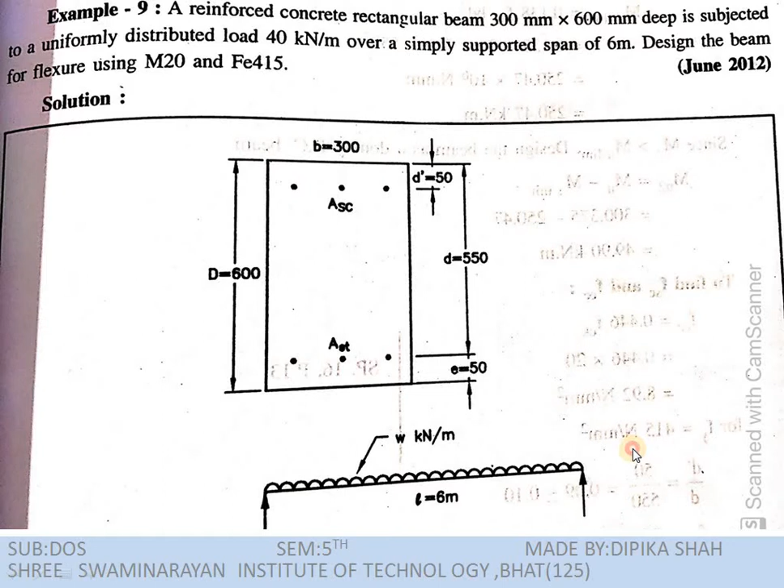For finding the self weight of the beam we have to calculate the area of the beam and then we will multiply with the density of the concrete. So area of the beam is 0.3 by 0.6 and density of the concrete is 25. So we will get a self weight of the beam of 4.5 kN per meter. Here imposed load is given. Imposed load is 40 kN per meter. So total weight coming on the beam is 44.5 kN per meter.

Okay, this load is a working load, so we have to multiply with 1.5 to get a factored load. So for a factored load we will multiply 1.5 by 44.5, so we will get W 66.75 kN per meter. Okay, now we have to calculate a moment. So for a moment in a simply supported beam, the equation is WL square by 8. So W is 66.75, L is given 6 meter. So we will put the value of W and L in this equation. So we will get MU 300.375 kN meter.

Okay, after finding the MU we have to calculate the MU limit. So for calculating the MU limit for M20 and Fe415 we have one equation 0.138 fck b d square, and this equation we have taken from SP16. So we will take this equation MU limit is equal to 0.138 fck b d square.

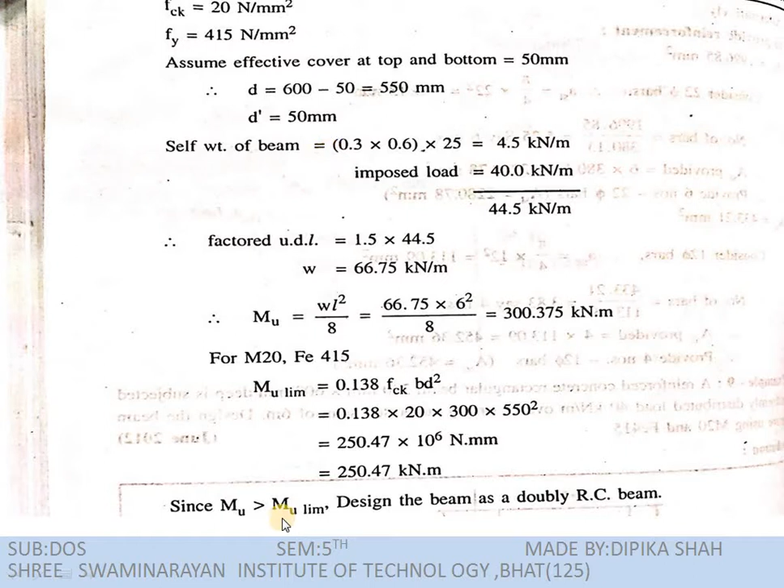Here MU is greater than MU limit, so we have to design as a DRC beam.

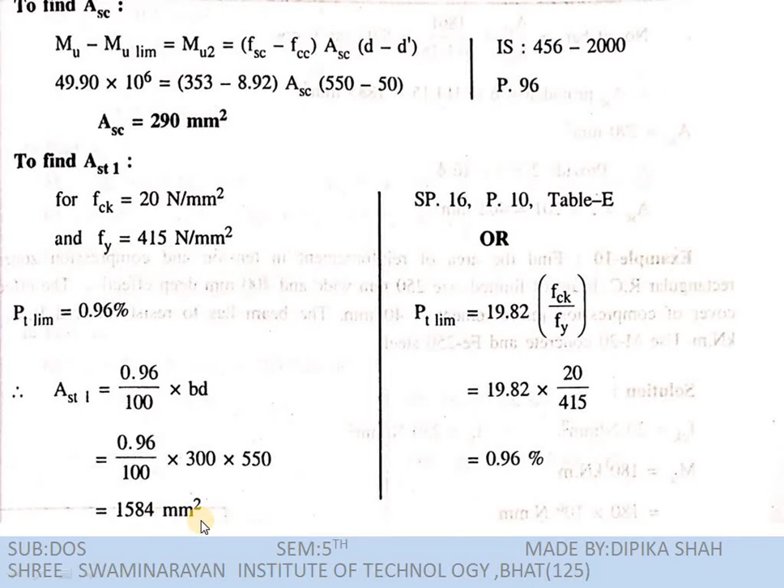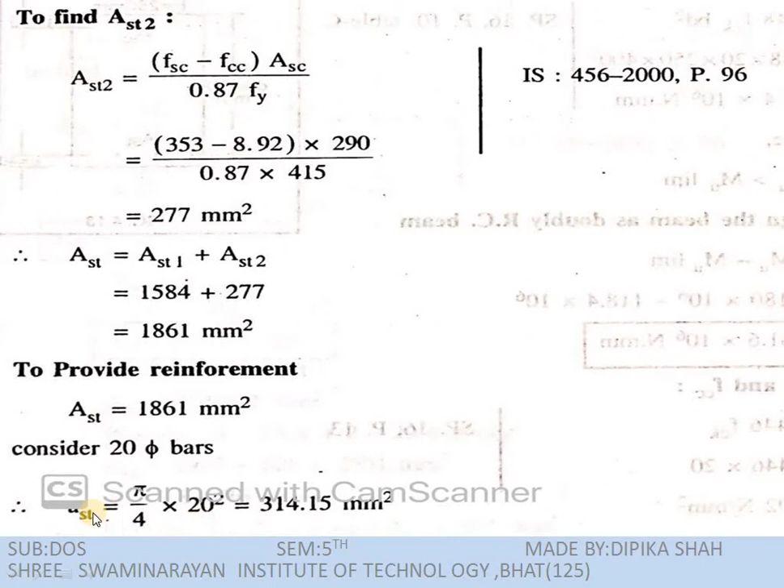Now we will provide this AST. So we will consider a 20 mm dia bar. So for one 20 mm dia bar, area of the steel will be pi by 4 d square. Here d will be 20. So small AST will be 314.15 mm square. Now for finding the number of bars, we will do AST by small AST. So AST 1861 divided by small AST 314.15. So number of bars will be 5.92. So we will take 6 bars.

So now we have to find AST provided. So for finding AST provided, we will multiply 6 bars with the area of the steel. So area of the steel here is 314.15. So we will get AST provided 1885 mm square. Now we will provide ASC. So for ASC we will take a 16 mm dia bar. So provide 2 numbers of 16 mm dia bar and we will get ASC 402 mm square.

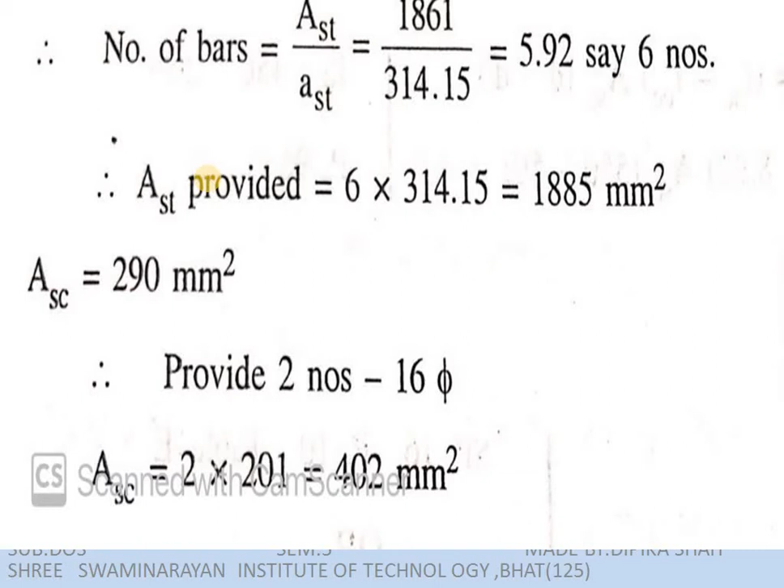So the example is: find the area of tensile and compressive reinforcement required for a beam 300 mm wide and 500 mm deep. The effective cover to tensile and compressive reinforcement is 50 mm. The beam is subjected to a factored moment of 270 kN into meter.

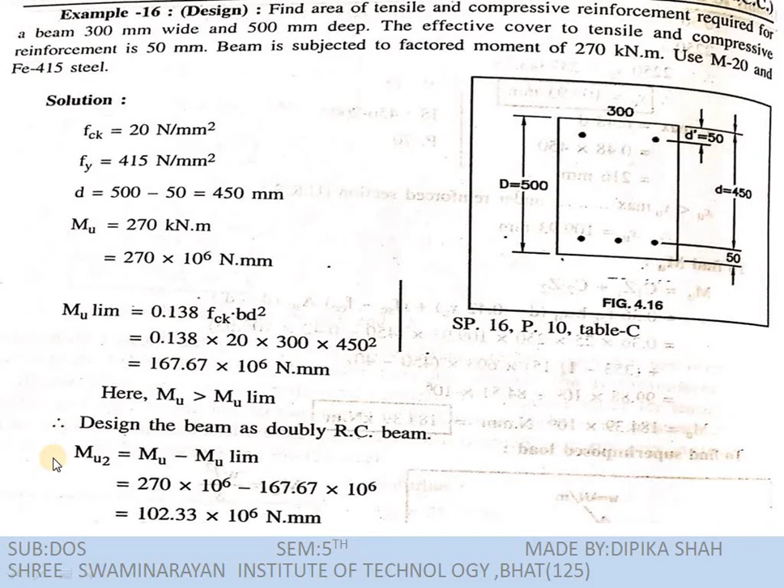So first of all we will get Mu2. For Mu2 we have the equation Mu minus Mu lim, and Mu is given as 270 × 10⁶, and Mu lim we have found as 167.67 × 10⁶. So we will find Mu2 = 102.33 × 10⁶.

Now we will calculate fsc and fcc for finding Asc. For fcc we have the equation 0.446 fck. We will put the value of fck in this equation and we will get fcc = 8.92 N/mm². For fsc, we will calculate it from page number 13 of SP 16. So fsc will be 342 N/mm².

So now we will find Asc, the area of steel in the compression zone. For finding Asc we have the equation Mu minus Mu lim is equal to (fsc minus fcc) into Asc (d minus d'). This equation is given in IS 456 page number 96.

So here Mu2 is 102.33 × 10⁶ N·mm, fsc is 342 and fcc is 8.92. We will keep Asc as Asc, and d minus d'. After putting all the values we will get Asc = 768 mm².

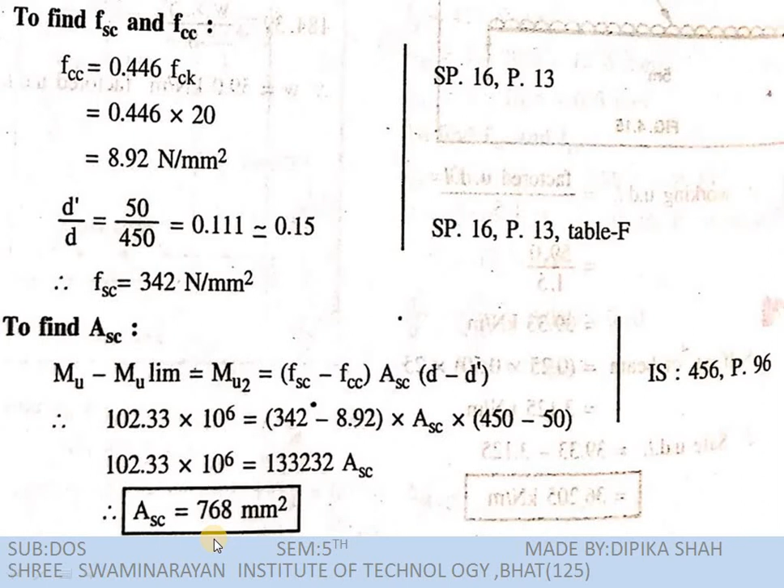For finding Ast we have to find out first of all Ast1, and Ast1 we will calculate as per a singly reinforced beam. So first of all we have to find pt. After finding pt we will calculate Ast1. For Ast1 we have the equation pt b d divided by 100. We will put the value of pt in this equation and we will get Ast1. Ast1 is 1296 mm².

After finding Ast1 we will find Ast2. For the equation of Ast2 we will use (fsc minus fcc) into Asc divided by 0.87 fy. This equation is given in IS code page number 96. After putting all these values we will get Ast2 = 708.5 mm².

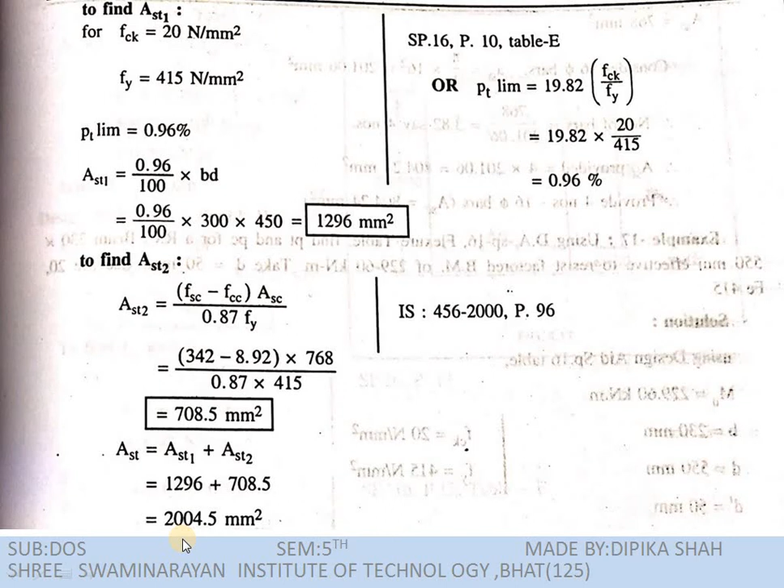For finding Ast we will sum Ast1 and Ast2. So Ast1 is 1296 plus Ast2 is 708.5, and we will get Ast = 2004.5 mm². After finding the values of Ast and Asc we will provide this reinforcement.

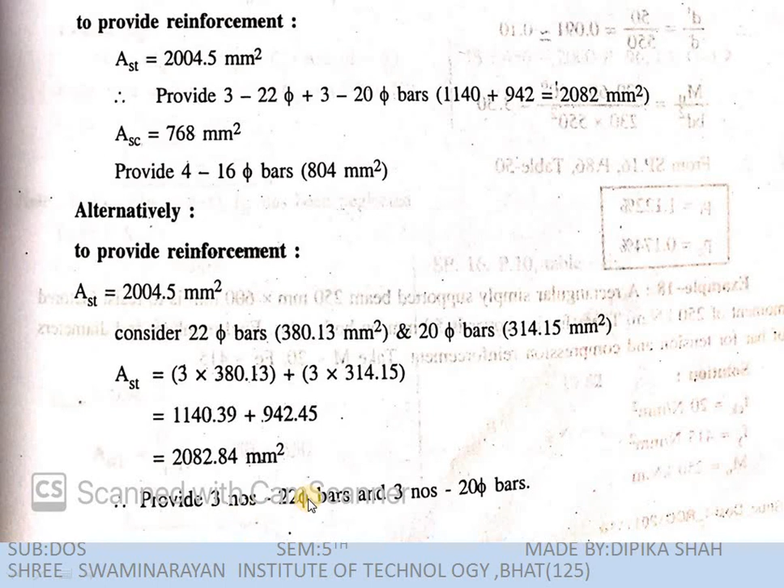We will provide this reinforcement as 3 numbers of 22 dia bars plus 3 numbers of 20 dia bars. The values of 22 dia bar and 20 dia bar are taken from SP16, but we can calculate the area of the bar from the equation π/4 d², and then put the diameter and number of bars in the equation. So for Ast we will provide 3 numbers of 22 dia bars and 3 numbers of 20 dia bars, and for Asc we will consider a 16 dia bar.

First of all we will find the area of one bar, small ast = π/4 × 16². For calculating the number of bars we will do capital Asc divided by small ast, and we will get 4 numbers of bars. We will find the Asc provided by multiplying the area of a 16 dia bar by 4, so we get 804.24 mm². So here we will provide 4 numbers of 16 dia bars in the compression zone.

So we have to calculate these DRC beam examples by this method.